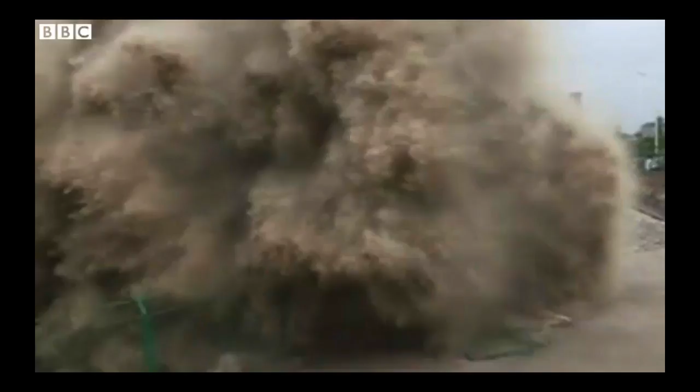More than 30 people were injured as a large tidal bore crashed with great force into the bank of a river near the city of Haining in China. Given extra impetus by a typhoon, the huge and powerful tidal wave gathered momentum with alarming speed. People were heard screaming and many ran for cover. A local observation station monitored waves as high as 20 meters, apparently the highest recorded in a decade. The impact of the massive water invasion destroyed the wave wall and the protection net along the river. The injured were taken to hospital. No deaths were reported.

So that's from a year ago. The first one was this year, just a couple of days ago. Why is that? Why should they occur this time of year?

Oh, we don't do this. Okay, turn the music off on this.

Tidal bores are driven by tides, and you get a high tide with a full moon. I think it was a full moon on Monday night. Full moon means the moon is on the opposite side from the sun, fully illuminated by it, so the pull of the sun and moon are in alignment, and hence the tides are large. Tidal bores, which exist at a variety of locations around the world, are largest when the tides are large. So this first one is in China.

This is some video of the Bay of Fundy, which begins at Maine—it's the bottleneck that opens up in eastern Canada. As we said before when talking about wave velocities, celerity, the shape of the bay, a few hundred kilometers long, and its depth are such that the resonant frequency for the water in that vessel, like blowing across the top of a bottle, matches a 12-hour forcing from the tides, so it resonates. That's why you also get tidal bores going up the rivers on the Bay of Fundy, which happens to have much larger tides than anywhere else—the largest tides in the world.

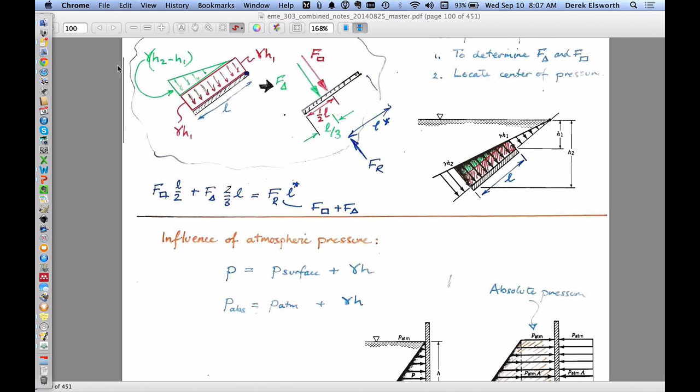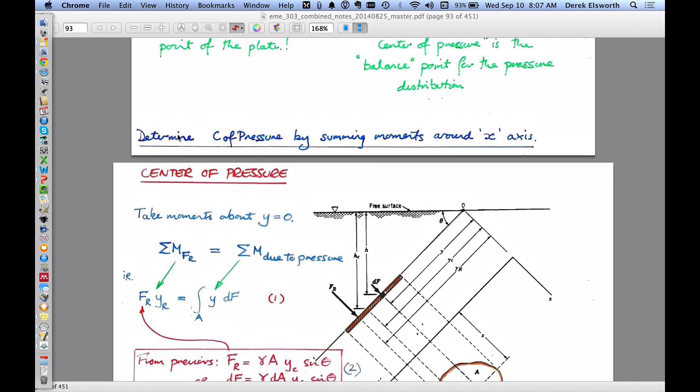So anyway, look for an email. You have a month to do it, so it's not urgent to do today, but you should put things in motion. Any questions from last time before we get going?

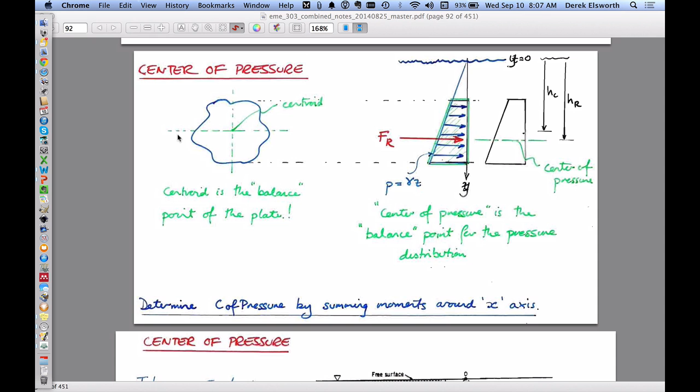Okay. What were we talking about last time? We were talking about pressures at a point.

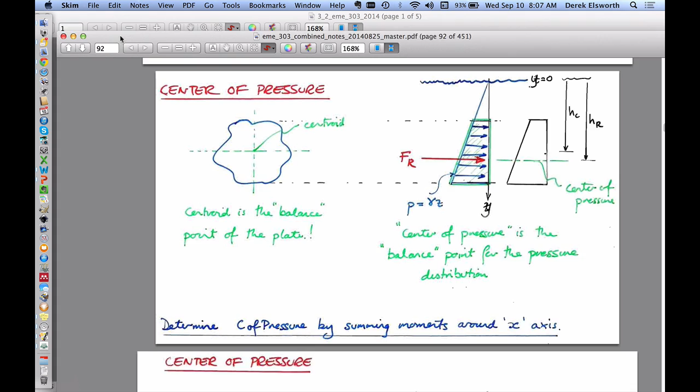Don't know why it doesn't want me to do this, and I'm going to draw some things just because I can. So, all right, just a recap from last time. It's week 3, the second period.

Fluid pressures, actually forces as well, on structures. We'll recap the 3 things that we've talked about, and you remember we made 3 points that we'd like to be able to do. We'd like to be able to calculate the magnitude of a resultant.

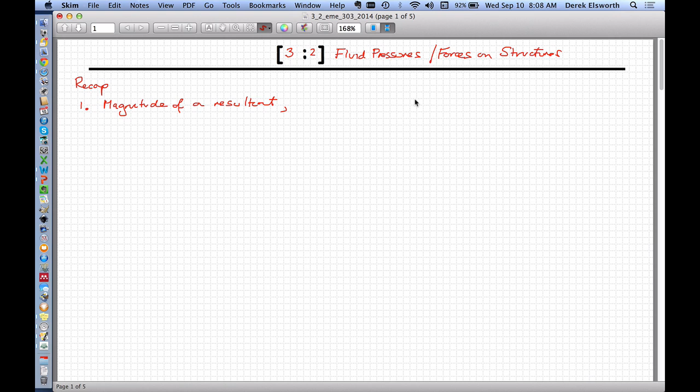So if we have a very simple structure, let's draw a very simple structure, and that structure is going to be just a straight wall that has a water level in it, that has a hinge at the bottom, that we want to apply a force, I'm going to call it force 0 because I just want to.

And so that's the system that we want to look at. And we said last time that if we look, for instance, at the pressure distribution for this surface, that so far we've only drawn pressure distributions for things that intersect the surface.

If you like numbers, let's just put a number on this, and let's do it 1 meter into the page. So what we'd like to do is figure out what the force is, F0, that we have to put on this to be able to hold this wall in place. Simple desire. It's water that's behind it in the system.

And so we said that the magnitude of the resultant is, we'll call the resultant FR, which is equal to the area of our wall or plane surface times the unit weight times the height, the depth of the centroid.

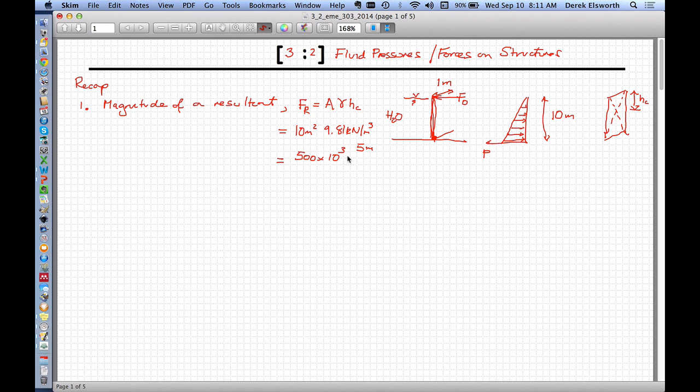The area is going to be 10 meters squared. The unit weight is going to be 9.81 kilonewtons per meter cubed, and we're going to have to multiply it by depth of centroid, times 5 meters. So that is going to be of the order of, I'm going to use this 10, so 10 times 10 is 100, so it's 500 times 10 to the 3 newtons, kilonewtons, right? If you work out, meters squared cross out with meters cubed, etc.

So we know the magnitude of the resultant, which acts across here. Second point: where does the resultant act? And for this particular job, we're going to call this y sub r. y sub r is just going to be the depth down to where this acts.

We did a quick derivation last time. We made the case that the resultant acts, in this particular case, at the centroid of the pressure distribution. So you take this triangle, you find its balance point, and see where it is. We did an analogous calculation. In this particular case, if this is equal to h, then yr is equal to 2/3 of h, which is equal to 6.66 meters. So we know where that is.

Beware that that exists only for the case where we did this simple calculation last time, but we can do it. And the third point that we wanted to be able to make was resolve a failure mode. And so the failure mode is, how is this gate going to fail?

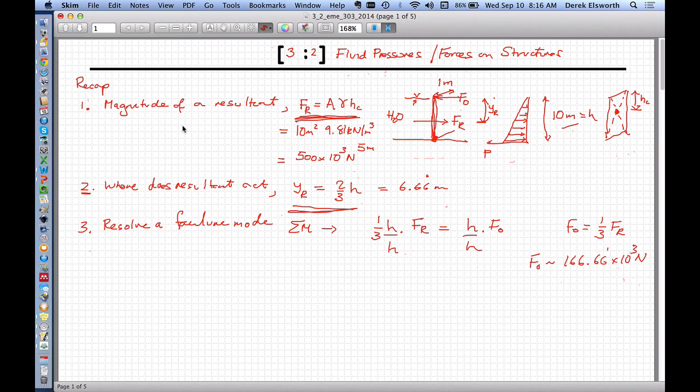Question? Yes, go ahead. When you say simple, what exactly do you mean by that? Do you mean that we don't count the shearing stress or something like that? By simple, I mean that for YR, you mean? Yes. For YR, I mean simple in that the structure is a rectangle and that it intersects the surface. That's what I mean. That's specifically what I mean by simple.

So the conditions that we applied in our derivation are that this intersects the surface, the water surface, could be above it, and then we wouldn't care about the part above it, right? And that it's of unit width, same width. That's all, those two conditions. Good question. Yeah.

500 times 10 to the 3 newtons? Is that not right? Oh, because it is, so all I've done is I've taken, this is 10 meters squared, which is 10 meters by 1 meter. This is 9.8, so I guess I'm just making this 10. And I'm multiplying it by this number here, which is on the bottom. So area, unit weight, times the depth of the centroid, which is half the height.

So 10 times 10 times 5 is 500. And then this is kilonewtons. And so all I've done is switch kilonewtons. So we could also write this as 500 kilonewtons, right? So that's all, I just switched those out.

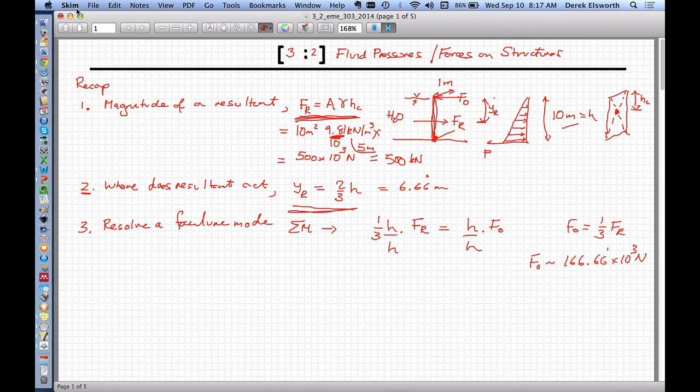Okay, all right. So what do we do now then if we do the not simple case where we have the condition to deal with something else? And so you see that this is now the case that we're dealing with.

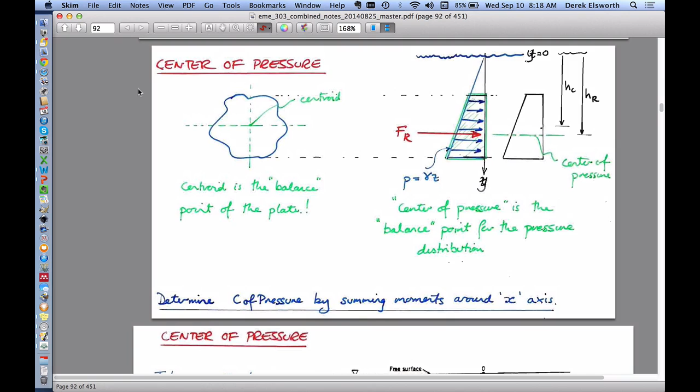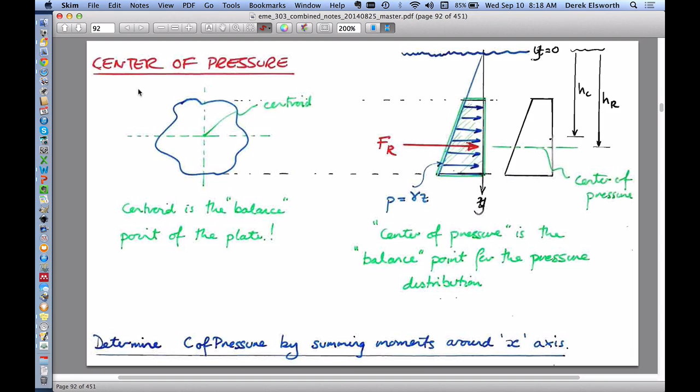We've just gone through this example. And so I'm not really interested so much in this derivation, but we'll go through the derivation. But we'll make the case that the final result of this derivation is the important part. So here's what we're going to do.

Remember that last time, to get this 2/3 component to define the distance from the surface that the resultant acts, we basically took, we equated that the sum of moments had to equal the resultant force times the location where it acted. So this is just the moment is equal to a force multiplied by a lever arm. It happened to be that we used this triangular distribution. We used this as our rotation point. We used FR as here. And we wanted to calculate YR. And so we figured out exactly what the moment was that we had to apply to be able to do that. And that's what we'll do again.

So what we can do is we can calculate the moment due to the pressure distribution by taking an inclined plate. It happens to have kind of an irregular section if you look at the profile of it. So in other words, it's this, just with a cutout in it. So it's not a full plate, it's of some random geometry.

And we know that the force that's applied is equal to the unit weight times the area of the plate, multiplied by the depth of the centroid below the surface.

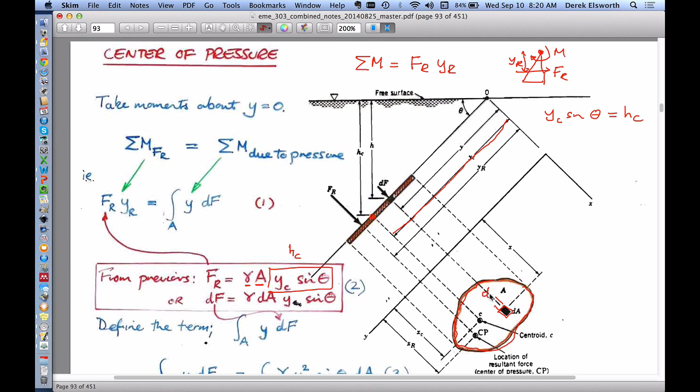So this is the expression we had before for the resultant force. If we take a small change in this, take a derivative, what changes? The force will change if we take a small area. So instead of taking the whole plate, we're going to take a small area, and that area will just be of some length, dy times dw, I guess, but we're not going to split it up like that. We're just going to write it like this.

Since we know that the resultant force multiplied by the location where that resultant acts has to equal the moment due to the distributed force of every single point along that plane — a small force here, a larger force here, larger and larger as we get deeper and deeper.

The expression for that is just this: the change in the force for every little area increment multiplied by y. If we take this expression and write it for every point, we already defined what this derivative is, and if we substitute this in, we end up with these components.

So we have this defined now as a function of all these differential components, and for general geometry that's not vertical but is inclined.

Now we can take this expression and divide both sides through by FR. If we do that, we have this defined as a function of this, and we know what FR is as well, right? We know what this is.

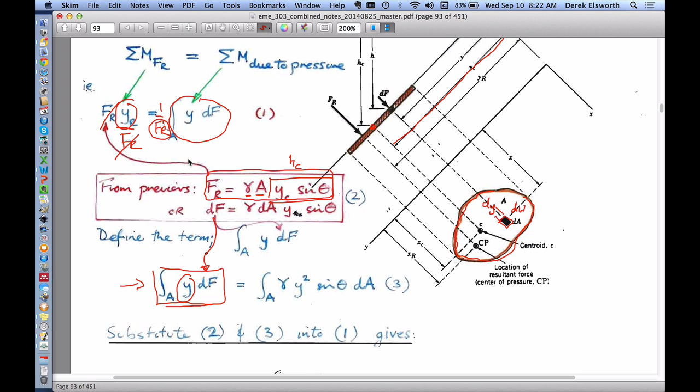So let's take those two things. This part here, we have right here. This part here, we have right here, and we're going to combine them together. If we combine them together, we get this expression just here. So this is something we've seen before, right? Unit weight of the fluid, the area over which it acts, times h sub c, the depth of the centroid of the plate.

And this is our new expression here that we've just got from this kind of complicated derivative. But you see that we can get rid of a bunch of these terms. This cancels out, and if we do that, we end up with a kind of complicated expression, but one that says something about how we'll use this.

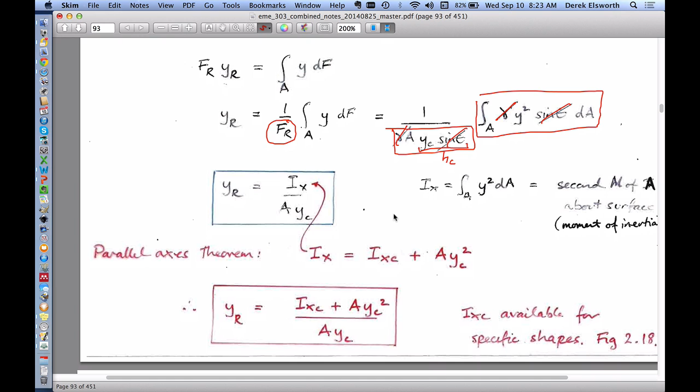It allows us to calculate the depth of action of these forces for absolutely any geometry, any plate we have, any shape, any inclination, and any depth below the surface, intersecting the surface as well as below the surface. And so it's the most general expression we'll have.

By definition, this term on the top, this integral, which we rarely have to calculate because we can use standard results for it, is called the second moment of area about the surface. So this term here is called the second moment of area about the surface.

All it means is a very fancy way of saying if you take a lever arm of something against the surface, then this would just be equal to the sum of the lever arm multiplied by the force that's applied and resolved for every single point on this.

So it's not very convenient for us to calculate this y squared term for every single geometry we have. So we do something different. Instead of doing it about the surface, we use a standard result where this point of rotation, where the pressure begins and varies linearly with depth, is taken to go through the centroid of the plate.

And if we do it through the centroid of the plate, what we can do is rewrite this expression, which is kind of complicated here and would require us to calculate it for every single case we did. We can replace it by a surrogate, and this surrogate expression has two parts.

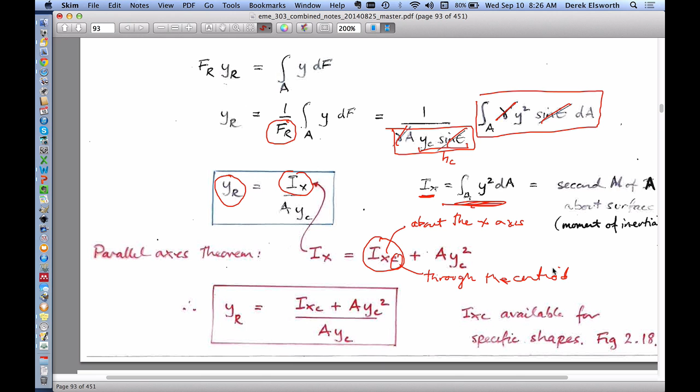Y sub C is the distance from my thumb to the centroid. I can't show it well because I don't have an extra hand, but I could do it like this - this is the distance from here to here. That's all, and you'll see that as we go down the page.

The bottom line is we can always calculate the depth to where the force acts as a function of a standard result if we know where the centroid is relative to the surface and if we know the area of the plate. That's it. That's an important result.

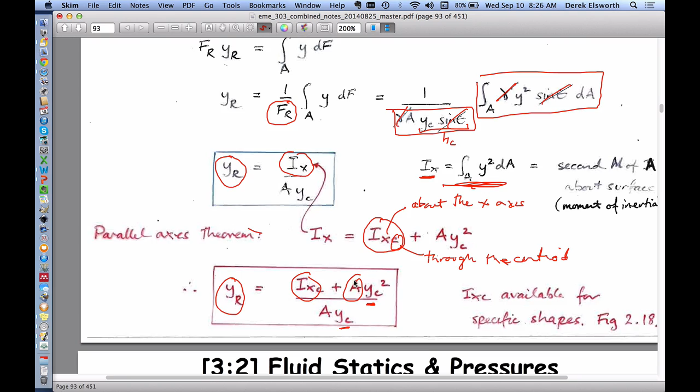You can, if you like, see another exposition of that calculation right here. This is actually a useful diagram. These are all the terms we've talked about.

IXC is a standard result, which we'll see how we get in a second. The area is the area of this plate. Y sub C is the distance in the plane of the plate to the centroid of the plate - the shortest distance to the surface. The x-axis is on the surface. That's it, those are the things.

So what you can see from this, if you write it in a slightly different way, as Y_R, it's exactly the same expression equal to this term. This is a useful way to write it because it says something about it.

It says that the force is going to act at a point - this is the center of pressure. And the center of pressure is where this resultant acts.

The resultant is given by the unit weight times the area times h sub c. H sub c is the vertical distance from the surface to the centroid of the plate - easy to get, we can do that for any system.

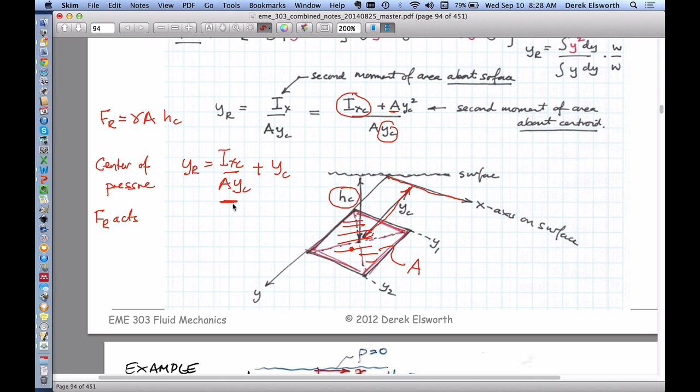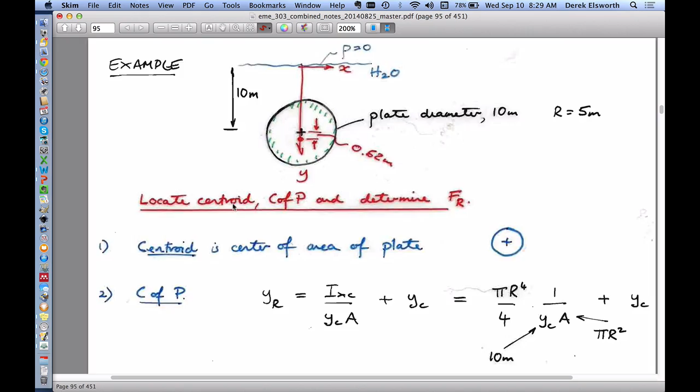We're not going to ask you to derive that, but we are going to ask you to use it in different cases. Here's a quick example to go through - just take it on trust that we can use it. I guess the other thing I haven't shown you yet, but let's zoom through to this, is that the standard result we're talking about are moments of inertia or second moments of area.

You've probably seen these in your past - these are standard results. So the term we're looking at is the second moment of area about the x-axis and through the centroid. It's just a number.

That's the other kind of mechanics explanation of this term. We're using it slightly differently. And you'll see here the area of the plate, of course, is just the product of the two lengths.

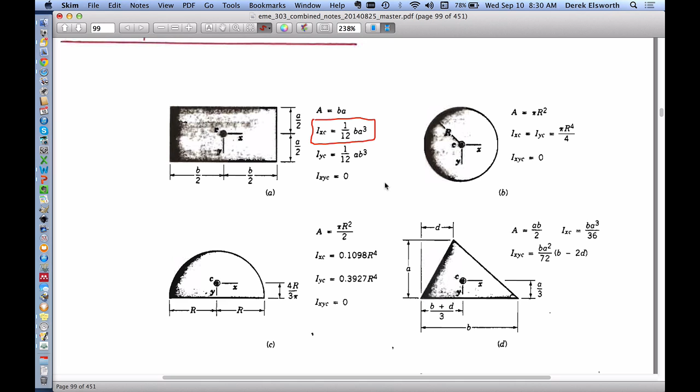The moment of inertia - I've just blotted it out, so let me get rid of that so we can see it, because we'll use it. We typically won't use this one, but we might use this one. This is the second moment of area about the y-axis, for something that goes through here with a pressure distribution that varies with y.

It's a bit more complicated, but let's go through an example to cement those ideas. So the two things we'll use will be these. The first question we'll do will be for a circle. The second moment of area, or the moment of inertia, for a circle is given by pi r to the 4 over 4.

So remember that, and also remember that this is 0. This is basically saying that if you have this stuck in water, irrespective of its orientation, the pressure acting on this side of the middle and the pressure acting on this side of the middle exactly balance each other out because of symmetry. That's really what it's saying. The point of action would be through the line that goes through the centroid in this arrangement, although it might not be at mid-height because of this linearly varying pressure distribution.

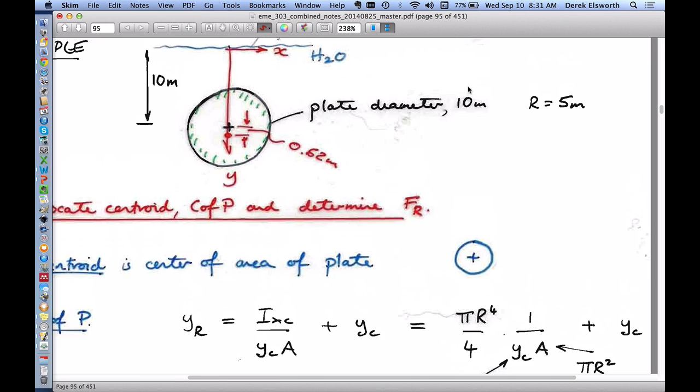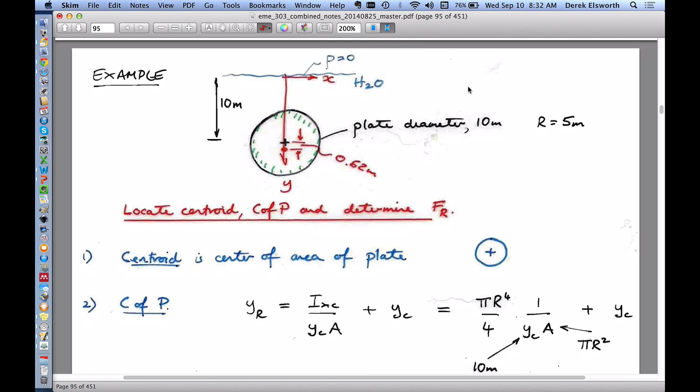So it's just an application of this. Here's the application: we have a gate, happens to be a circular gate. It's a plane example, so it's like a coin. What we want to do is calculate the magnitude of the force that acts on this plate, because we're going to assume that this plate is a washer that has a shaft through the middle of it, and it acts as a gate.

When the pressure is acting on the bottom, it will try and push this gate this way if there's nothing on the right-hand side, and you have to apply a stop to it to be able to stop it. So our question is going to be: how much force do we have to apply here to be able to stop it from opening?

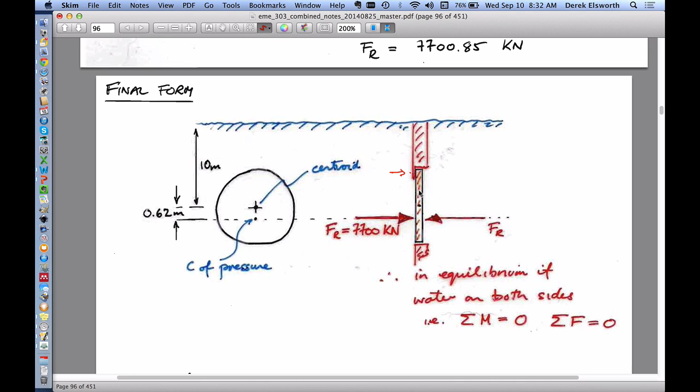So we'll do the three things that we've talked about. We want to calculate where the force acts first - so we're doing the second one first. The force acts at a distance below the surface, y sub r, which is given by the second moment of area divided by the depth of the centroid. And in this case, it is the depth of the centroid because it's a vertical plate, and the area.

So what's this term here? This is the term we just pulled off - the second moment of area. What's the depth of the centroid? Well, the centroid of a circle is where? It's the midpoint. The centroid of the circle is 10 meters deep below the surface.

Everything's measured from this coordinate system. X is on the surface of the water, Y is vertically down through the plate. In our case, the plate is there, so Y is vertically down. If the plate was inclined, Y would be in the plane of the plate. So we have those terms, and we have the depth of the centroid, which is also equal to 10 meters.

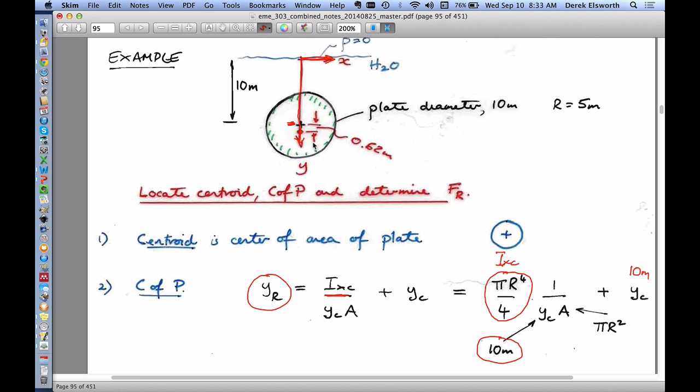So if we know the radius is 5 meters - the diameter is 10 meters, so the radius is 5 meters - we have everything we need to be able to calculate that. And I'll let you go through the calculation, but it's just using those terms. It's important to understand the geometry and how we use those terms.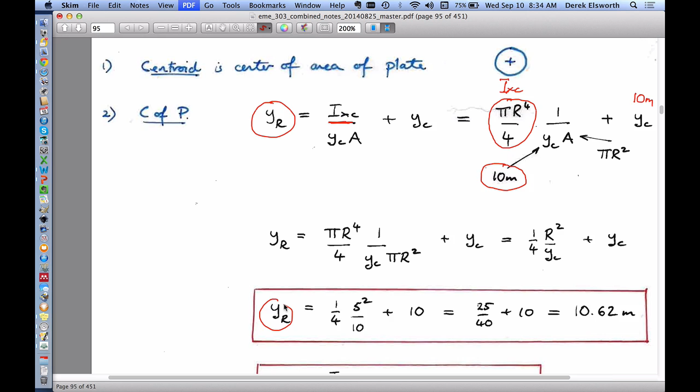And so, lo and behold, what comes out is that the depth at which this force acts is equal to 10 meters, which is Y sub C, the depth of the centroid, plus a small amount, 25 over 40. So 25 over 40 is 0.625. So we calculate it's equal to the depth of the centroid and a bit more.

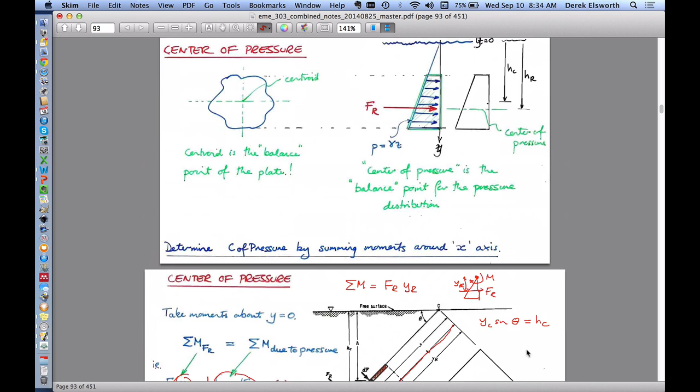And the reason it's a bit more than the depth of the centroid is because of this: if you looked at this distribution here and looked at the midpoint, you have a larger force acting on the bottom part than on the top. So if you resolved around the middle of this portion, you'd find that this moment was larger, and so the balance point is below that. This point of action, the center of pressure, is the neutral point along this plate, where the force acting below it times its location, and the force acting above it, would be exactly balanced.

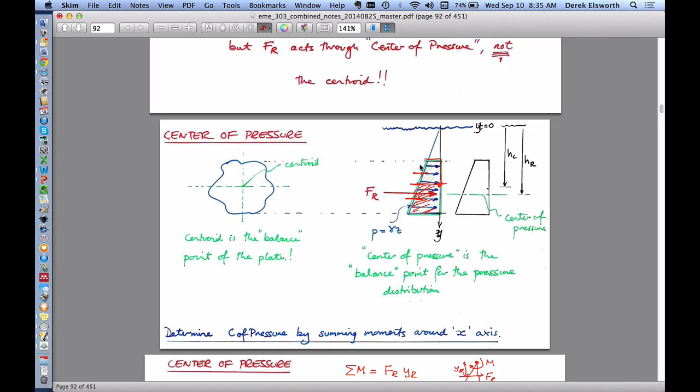They would give you no net moment. And so you can see in this place, the reason that it's below the midpoint is because you have a slightly larger pressure distribution, this area here, acting below it, than you do have acting above it. So that's the basic reason. It will always be larger than below the centroid, always, or it could be equal to it. In this case, it's below it by 0.6 of a meter.

We could calculate the location. We haven't derived this equation, let's not derive it. Where does the resultant act in the x direction? So remember, our plate is here, my thumb is the x direction on the surface. And so not only can it rotate this way, but we could take moments about it this way.

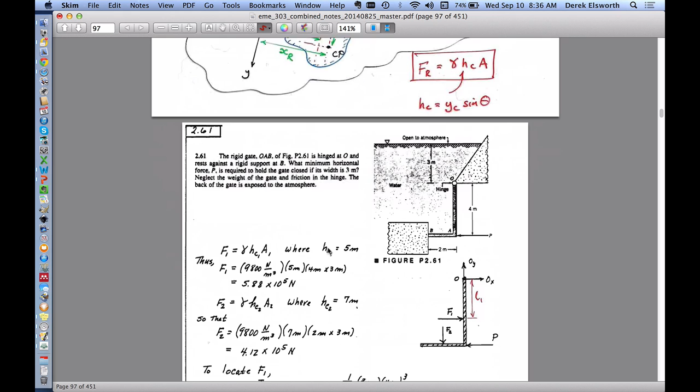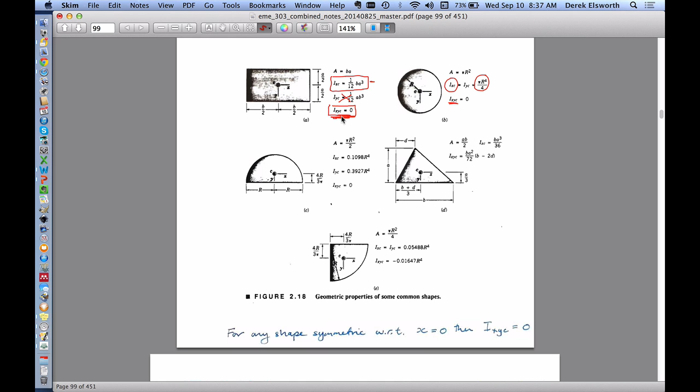You know from the geometry, you can imagine that because the distributions as two stripes getting higher pressures as you go down here are identical on both sides, there'll be no net moment around the center axis. And the exposition of that is this term here, where we do have an analogous expression to what we had before. This is exactly the same as this, except we've swapped out the value for this second moment of area. As we said before, this second moment of area is equal to 0. And that's just an indication of the symmetry of this thing. You've got as much stuff trying to twist it this way on one side as you do on the other side. Even though the distributions are linearly varying in depth, they'll be identical on either side as two stripes. And so the value of this term is 0.

And when you add that term into this, if this is 0, then the location of action is the centroid. So now we know exactly where it acts. We know that it acts 10.62 meters in an inclined direction down here, and it acts dead in the center of the circle. And so we don't need to know this one, but we can get it from this.

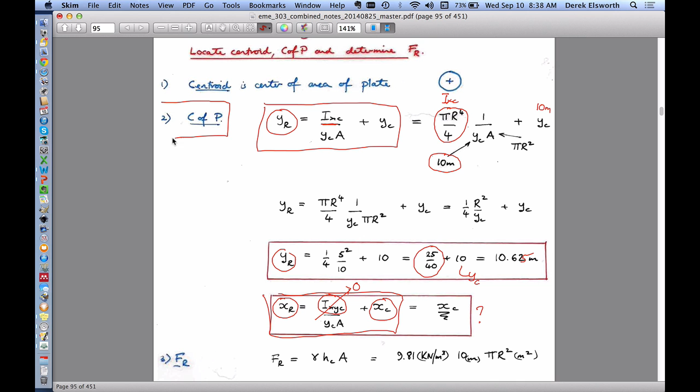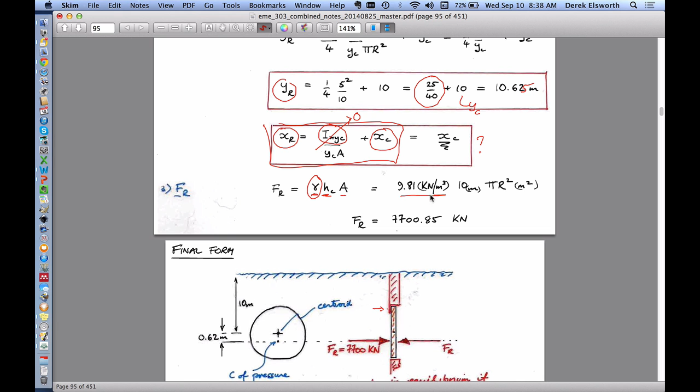So we've got the first part, which is where does it act? How big is the resultant force? Unit weight times depth of the centroid times the area. Unit weight is 9.81 kilonewtons per meter cubed. The depth of the centroid is 10 meters. And the area of the plate is just pi r squared, or pi d squared upon 4. So this here is 10 meters.

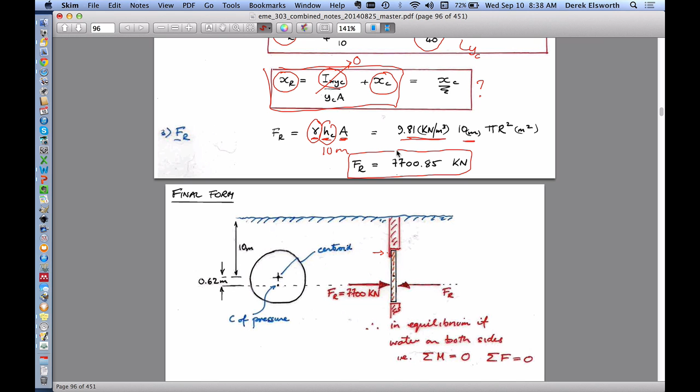And if you do the calculation, you get a force that acts. So we have two parts: we've got a force, we know where it acts, and so we can do our stability calculation.

Stability calculation, straightforwardly: this is the side view, this is kind of an isometric view. So this is the shaft that goes through the circular gate. It's like a butterfly valve on a carburetor, if any of you know what a carburetor still looks like—not in vogue these days, I guess, with fuel injection. And so it rotates around here. If it's filled with water on both sides, then the force acting on the left side would be exactly equal to the force on the right side.

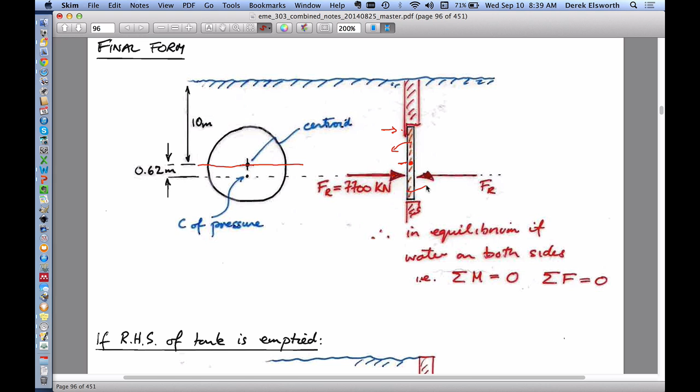Just dunk it in water, it just sits there, irrespective of this. Take the water away from the right-hand side, then all of a sudden it will want to rotate. Since the point of action is 0.62 meters below this, there'll be a lever arm of this against this given by this force, which will tend to swing the gate this way. And if you want to stop it, you need to apply some force here. So that's basically the question being asked of you: what force do we need to apply to keep the gate shut?

And so all we need to do is take moments. If you look at the sum of the moments, we have a force it takes to keep it shut multiplied by its lever arm. The lever arm has to be 5 meters. In the other direction, we have a force that's trying to open it. The lever arm for this has to be 0.625 meters.

Just trying to prove how clever I am, that I can do math in my head. So this we know, this we know, obviously this we know. The only thing we don't know is this, then we can solve for that. And it turns out to be 1,000-ish kilonewtons that we'd have to apply to keep it shut. And that's it, so don't overcomplicate things.

Remember the rules that we have. We have to calculate a force that acts. Force, or the resultant force, is equal to unit weight times the area multiplied by the vertical depth of the centroid of the plate. If it's inclined, the vertical centroid of the plate is just this height.

We want to know where it acts. We use this second moment of area formula. The coordinate system for that has to be x on the surface, y in the plane of the planar surface. It can't be curved, it has to be planar. It can be any shape.

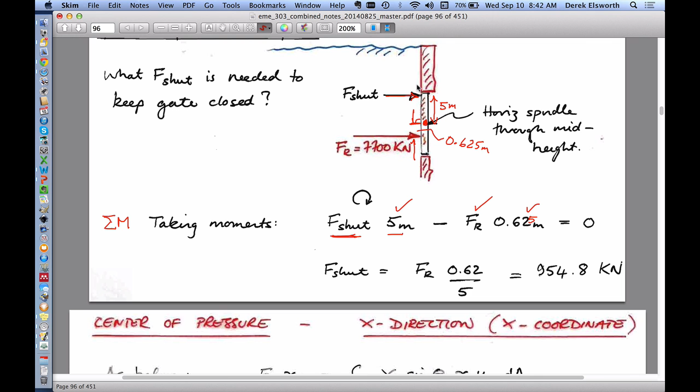Whether it's the top blowing off a Comet airliner, or the Aloha 737 going from Hawaii to the islands of Hawaii, or these kind of hydraulic structures, then you have to define a failure mechanism to resolve either moments, or resolve linearly in x and y.

So we've taken this result for granted, so I'm not going to go through that. This is kind of a useful diagram maybe. This is just the things we've talked about to define exactly what these components are. The centroid of this we can get from these standard shape theories. The distance to the center of pressure is measured with the slope distance, and the distance to the centroid is measured vertically. So that's one thing I'll add, given by this thing here.

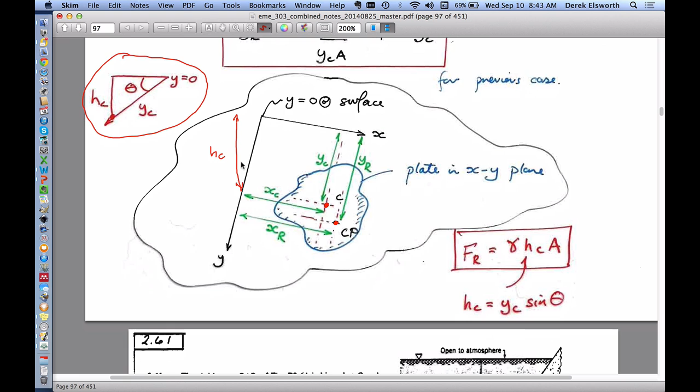Yes, this is actually useful, right? So YC is the in-plane distance to the centroid, and H sub C is the vertical distance from the centroid to the surface. And if you remember those things, then everything will be wonderful in this class.

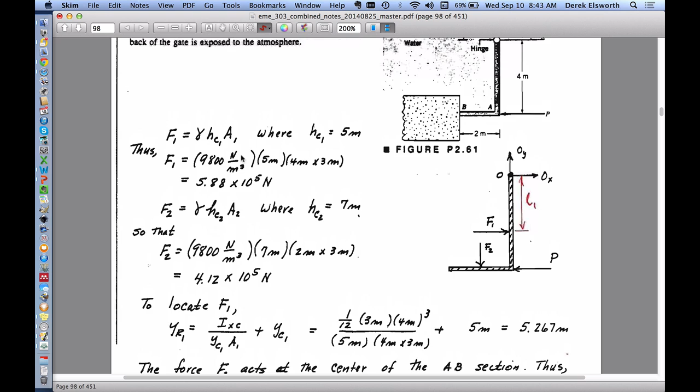All right, well let's go through a slightly more challenging question, very similar to the one before. Yeah, so we'll finish off on this one. So you have a slightly more complicated geometry. I won't go through the calculations, but we'll just talk about how to do it.

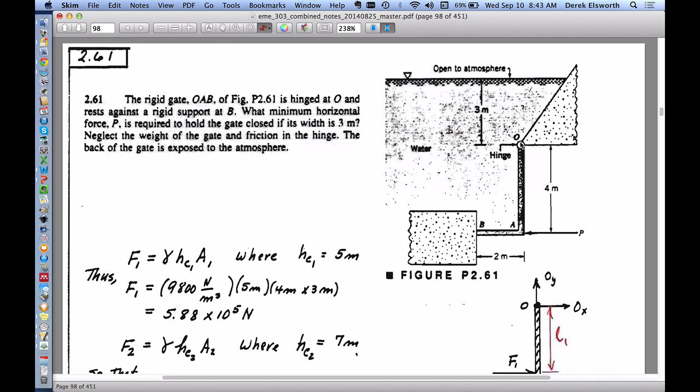What do we have? Well, we have a gate that hinges around here. We want to know what kind of force we have to apply to keep this gate closed, and that force is P, and that's basically the question. We have some dimensions of this wall: 4 meters down, 2 meters across, I think 3 meters into the page.

And so if you look going in this way, this is 3 meters. I won't draw it here because it'll make it complicated. And if we look at this vertical wall, you can imagine that the pressure distribution looks like this. And we'd like to know the force F1.

And if you look at this bottom wall here, you could imagine the pressure distribution if we look at all these little pressure lines here. Actually, it doesn't look like this, does it? It's going to have a portion on it here which is added to that. Let's be clear about this: because the pressure here isn't zero because it's below water. But the force acting here is going to be equal to this, and this is going to be F2. And I've kind of destroyed my F1.

So the important thing about drawing this is that it will not be at 2/3 of the height. 2/3 not, I guess, right? So we have to remember that. So let's go through the quick calculation to do this.

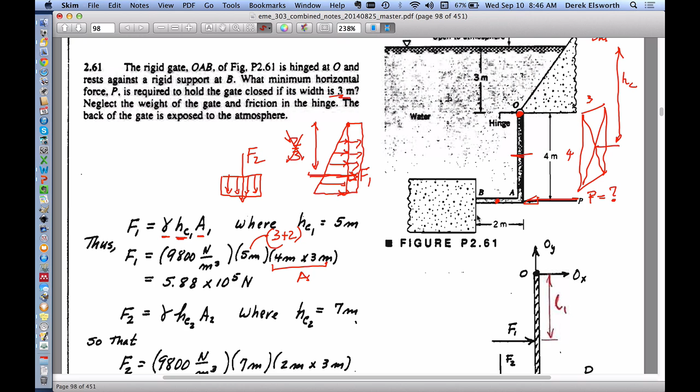The centroid of this plate, where is it? This is the centroid, right? I can't draw it so well, but it's just horizontal. So it's 2 meters this direction, 3 meters this direction. It'll be right in the middle. It's about the right size piece of paper. And so the centroid will be physically in the plane of the plate, and so the centroid has to be this depth, h sub c.

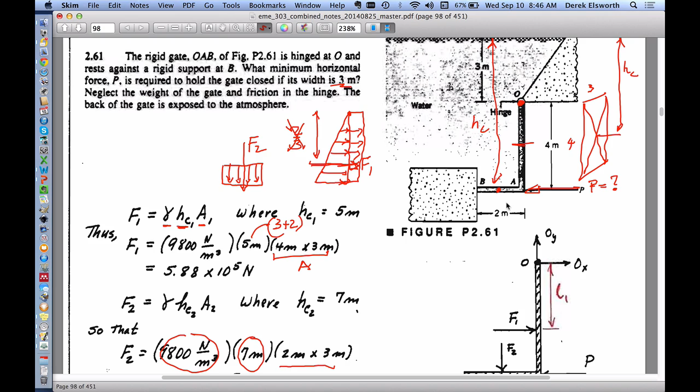So what's that? H sub c is going to be 3 meters plus 4 meters. This is h sub c, this is the unit weight of water, and this is the area of the plate: 2 meters in this plane and 3 meters into the page. So we have both the forces that are acting on the structure.

To be able to solve this problem, we're going to need to take moments about a point. This point is going to be here. So we need to know where this acts, and we need to know where this acts.

Bottom one's easy, right? It's a uniform distribution, so nothing varies. It's going to be dead slap in the middle. You could do the calculation to figure it out, but you know that if the distribution of pressure is uniform across it, by definition, it has to balance about this middle point. So the location of the centroid, the point of action, is going to be here, which is 1 meter in. That's just by inspection.

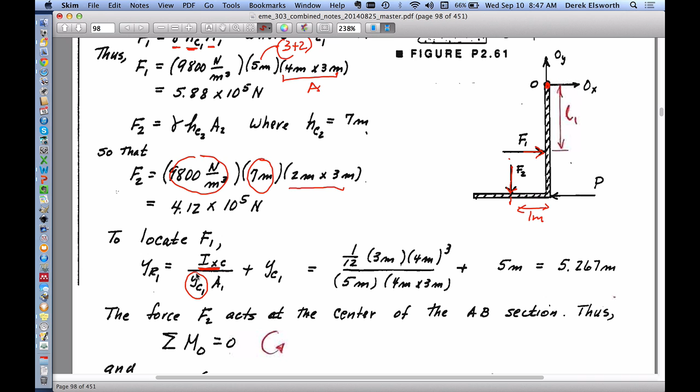The other one, we can do our location based on our parallel axis theorem. We need the second moment of area about the centroid, the location of the centroid, and the area.

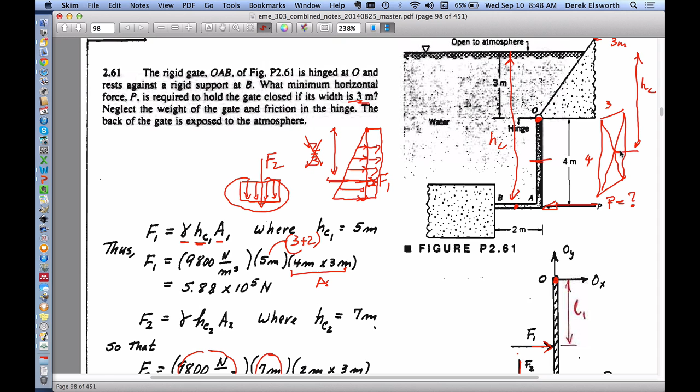Location of the centroid, in this case, is here. So y is vertical, and it's going to be 3 meters plus 2 meters to get to this point, right? This is also the location of y sub c. So this should be 5. 3 plus 2 is 5.

The area of this plate is 4 meters down and 3 meters into the page. So this is area of plate 1. And by parallel axis theorem, is it behind? No, it's below us, right? So this is this expression here: 1/12th times the width of the plate multiplied by the depth of the plate cubed.

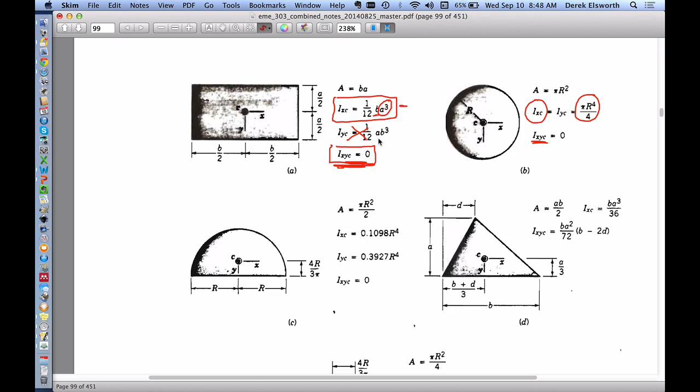Let's get this on here. 1/12 times the width of the plate times the height of the plate cubed plus the depth of the centroid. So this is just this expression here.

And what comes out of it is that the depth of action is equal to the centroid of the plate plus a little bit. And that little bit is 0.27 meters. So this would be the centroid, and this is 0.27 meters

below it. Okay. And then, so we have the forces by magnitude. We have the point of action of both the forces. And so now, if we want to look at failure, which is separate from all of the stuff we've done before, we have to resolve around some kind of failure mode.

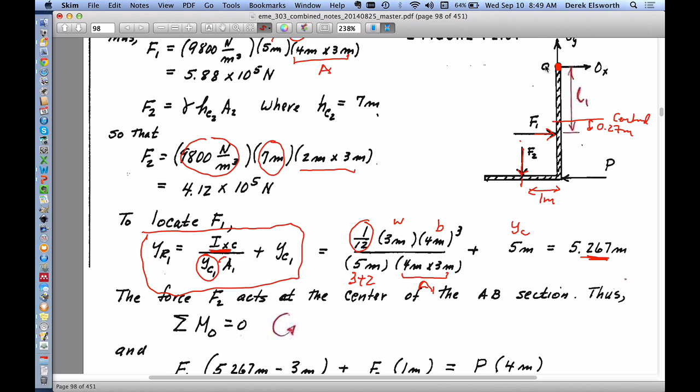The failure mode is that the plate's here. We've got water pushing down on it to kick it out. We've got water pushing on the side of it to kick it out. So it's going to net move in this direction. And so we restore it by applying this force P.

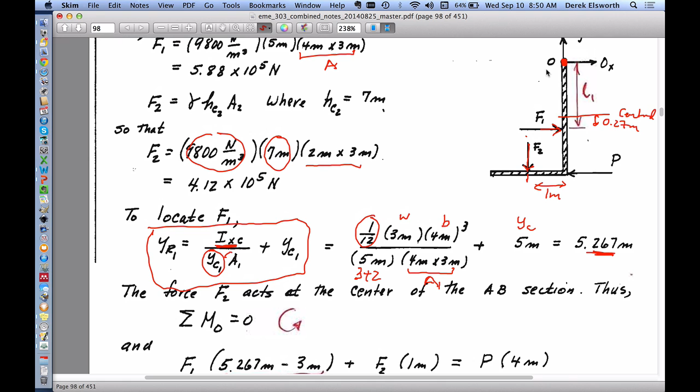And so we just take moments around the top. And if we take moments around the top, then I guess let me make this smaller so it all fits on at the same time. Then we just have this: F1 multiplied by L1.

Okay, so yeah, so this is 5.27. It's 3 meters to get to this point here. So this point here is going to be 2.27, right? To this point here is 2.27 meters. So this is L1 times F1. So F1 times L1 is counterclockwise. F2 times 1 meter is also counterclockwise.

And it has to balance with the restoring force, which is going to be this force P multiplied by its lever arm, which is the height of this, which I think is 4 meters, right? And so P times 4 meters. And so we know everything in here except for this one thing here. We don't know what this is. So that's our one unknown. One equation, one unknown. If we rearrange it, we solve for the magnitude of the force we have to apply.

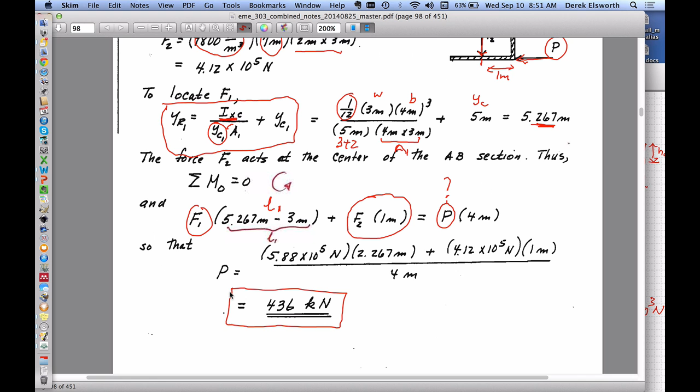And it's a force that's applied to the total system. And so when you think about this, you will have to think about it in a week's time for the assignments. Remember these three things: magnitude of the force, a very simple expression defined by the height of the centroid of the plate below the surface; the location where it acts, defined by the length in the plane of the structure that you're looking at; and then if you want to look at how it fails or behaves, you resolve around a point that's not random, but says something about how this thing would actually physically fail.

And in this particular case, the failure mode is by rotating around this hinge by definition. So that's it. So I'll leave it at that.